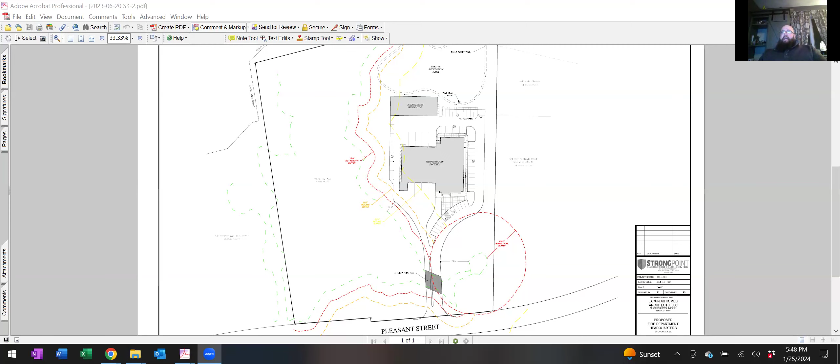So to that end, I'm going to bring up what ultimately became the proposed plan set. That's not the one. I believe this is also not the one. Gotta be this one. Okay, so what we're looking at here is the layout sheet from the plan set that we put forward.

You can see from the layout sheet that aside from the wetland crossing area, we've kept all hardscape out of the 25-foot no activity buffer zone, by design, to meet what is in the local bylaw. We have proposed to cross the wetland in the location we talked about.

This wetland crossing meets all of the requirements of the Massachusetts Stream Crossing Standards for an optimal crossing, which is beyond just a standard crossing. So it's the Cadillac, so to speak.

As we move through the plan set, I'll go to this sheet because it shows two more things: the limit of grading on the site and the drainage facilities, which come right up to the edge of the 25-foot buffer so we can maximize the area we have to work with.

It also shows that we have a fair amount of retaining wall around the site. As you come in from the road, the natural grade dips down to the wetland and then starts to come back up. Obviously, that doesn't work very well for fire trucks, so we need to flatten that out a bit.

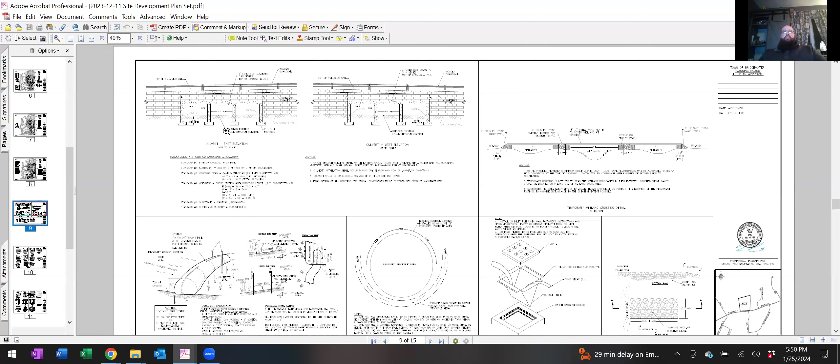I'm going to jump around a little bit, but with regard to the crossing itself, we did provide a detail, and this is what it looks like. Nope, wrong button. So this is a view standing basically at the vernal pool looking into the crossing, and I'm going to zoom in.

What we proposed at this time is 3 18-foot wide box culverts side by side. The reason for the sizing relates to the Massachusetts stream crossing standards. Standard 1 is that whenever possible, you provide an optimal standard, which is a 3-sided box culvert, so that's what we're providing. We have to embed those at least 2 feet into the substrate, which we are proposing to do.

Now, crossing span: what the stream crossing standards call for is basically 1.2 times the width of the wetland itself, boundary to boundary. In this crossing, the width of the wetland is 40 feet. We increase that by 20%, so we need a 50-foot wide crossing. Now, 50 feet is a bigger span than we can support structurally, so we did need to make some accommodations, and that's where we landed on 3 box culverts, 18 feet each.

The area in between, where you see my cursor here and here, is where the box culverts will butt together, and they will be located on footings inside the wetland boundary. The only permanent disturbances in those locations will be the sidewalls of the crossing. To help offset that, we've gone with 3 18-foot crossings, giving us a total opening of 54 feet, a little more than the 1.2 times we talked about.

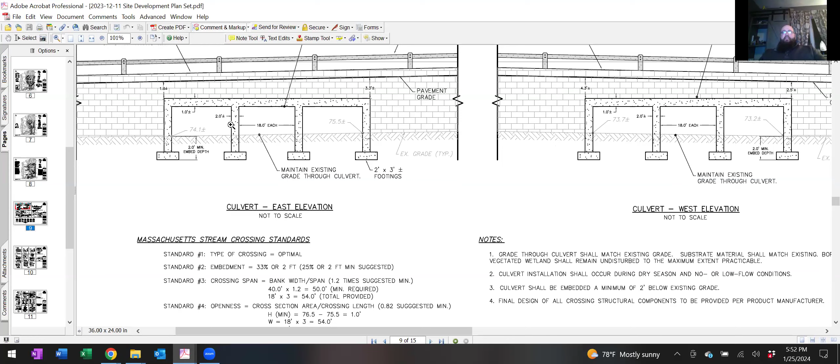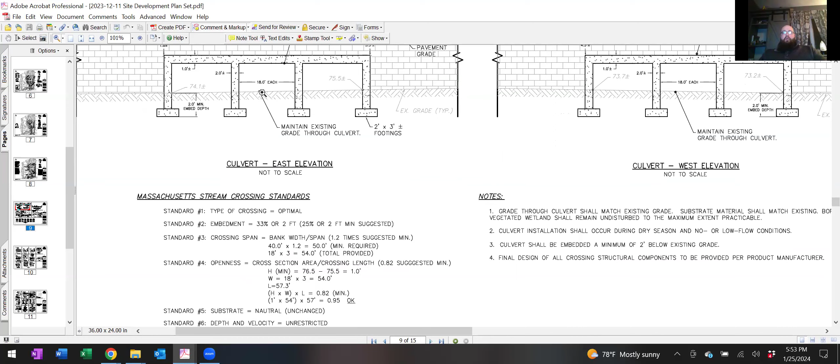From there, we get into the height of the crossing. We talk about the openness ratio, basically the cross-sectional area over the length of the crossing, and we illustrate that even from a conservative standpoint, we exceed that. We have a natural substrate for the bottom of the crossing, exactly what is called for, and we have unrestricted depth and velocity. So all of that is to say a lot of thought went into this design, and it does meet the standards.

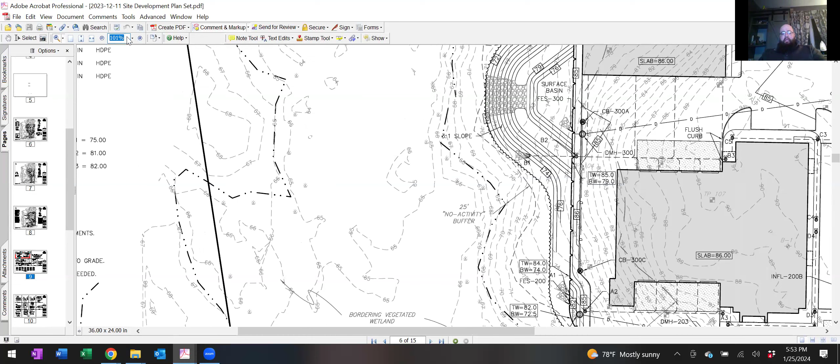Moving back to a different sheet, one thing noted when we submitted to DEP and they issued their permit number was that we did not propose at that time wetland replication to offset some of the disturbances. That was my choice. My reasoning was that this is a very small area of impact, totaling just under 1,800 square feet. Relate that to the much bigger body of the Hockomock Swamp, and it's completely negligible. Additionally, the site is entirely vegetated now, so there aren't a lot of degraded places on site that we could go in and make better.

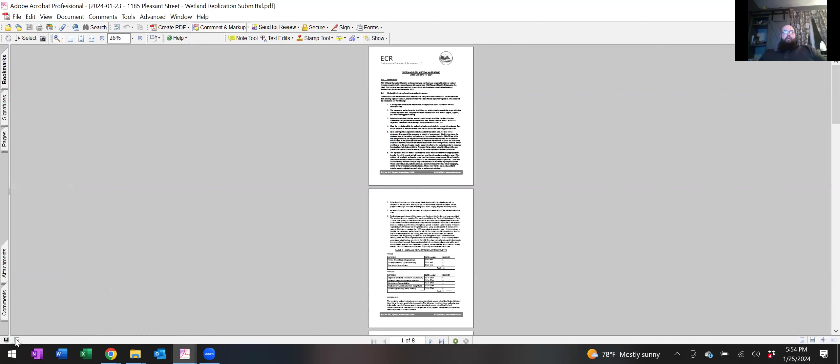DEP made some comments that while they understand that, the regulation does call for a 1-to-1 wetland replication. So we went back to the drawing board on that, and that's where we submitted this document. You folks should have received this, albeit earlier this week. I know we didn't make the 1-week timeline, but I wanted to get this in so we could walk through it here. And if you need more time to review it, absolutely, we understand that.

This is the crossing, and this is a drainage outfall right here. So we've situated a location of equal area to the crossing to do a wetland replication just off the end of this drainage outfall. The thought being that we're already doing some disturbance in that area, so it won't take a whole lot more disturbance for us to get into this area and do what we have to do. I'll spare you the gory details, but if you read through the protocol on how to create this, there are requirements to not clear cut the area. We're going to preserve the trees that are existing and appropriate, things like that.

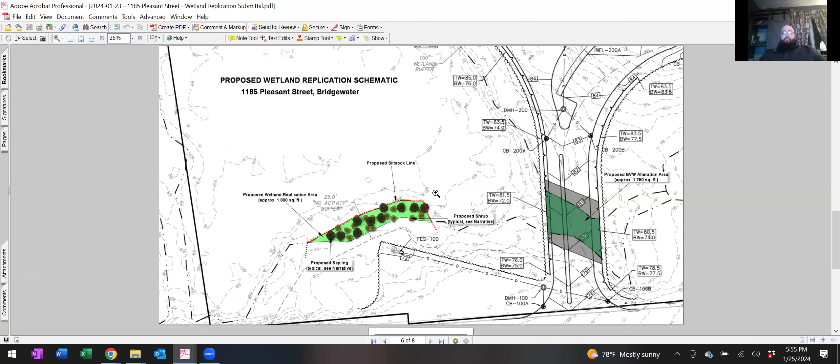I did have a conversation with the agent at DEP regarding this today. They noted, obviously, it is up to the commission to determine whether or not this replication is appropriate for the project, but they do not pose any further comment on this, which is a positive.

Jumping back, I'm going to touch on just one more thing that I think is important. If you look at our utility sheet, what you see is that we have sewer and communications all coming through the wetland crossing, through the main driveway, on top of the culvert but below the pavement. Those systems don't require a ton of earthen cover. Water, however, does. This site is serviced by a 3-inch domestic line for water, which isn't huge, but an 8-inch fire line, which is very big.

So we had 3 options to bring the water line over the crossing or through the area of the driveway. The first option is to put it on top of the wetland culvert. In order to do that and make cover requirements, we'd have to fill even more on top of the culvert, which just equates to more fill material, more retaining wall, and different drainage patterns that would be less site friendly. So we didn't think that was a good deal.

Alternative number 2 is that we tunnel it and go under the culvert. That makes for a lot of maintenance problems if there's ever an issue down the line, and causes a whole lot more wetland disturbance to install, so we didn't want to do that either.

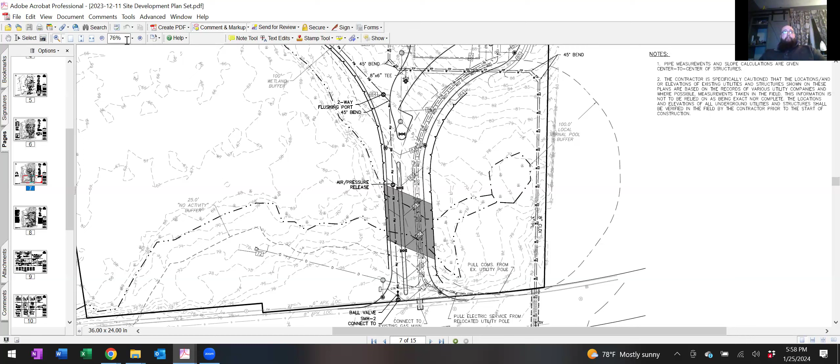Beyond that, we have provided extensive details for all the stormwater management. Sparing the gory details, the stormwater management on this site is a mix of a surface basin back here. We have one rooftop infiltration basin on the east side, and a subsurface basin that collects stormwater runoff on what we'll call the south side of the building.

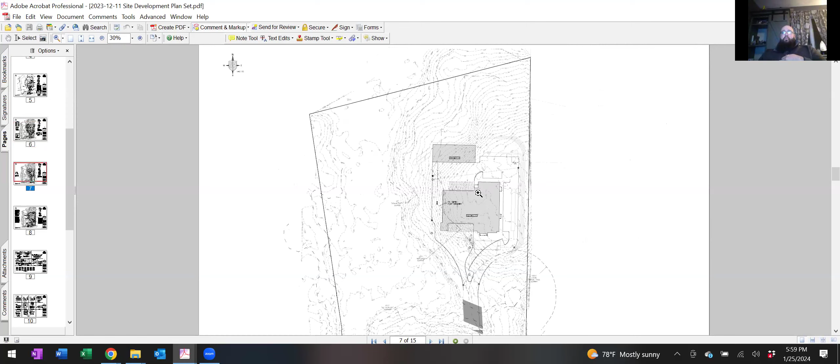Sparing the numbers, everything does meet and or exceed what is required under both the Massachusetts stormwater standards and the town stormwater requirements. So we hit all the marks with regard to water quality, recharge, peak rate attenuation, all of it. Beyond that, we've provided a complete erosion control plan. Obviously this project will be subject to a NPDES permit, so there will be additional oversight on erosion controls and things like that. We provided an operations and maintenance plan for the stormwater system and general upkeep of the site moving forward. So we feel that we put together a pretty thoughtful and conservative package for this, all things considered.

So, Madam Chair, rather than me just droning on for the rest of the night, I'm sure everybody's fallen asleep, I will turn it back to you for any questions.

Wendy, could I just interrupt for a second? Thank you, Eric. Yep, go ahead, Bob.

Eric, can you just speak to the need for the Army Corps of Engineers permit? I can, yes. So whenever you fill a wetland, you need to basically file a separate permit with the Army Corps of Engineers. In this case, because we're disturbing, not filling, less than 5,000 square feet of wetland, we can file what's called the self-verification form with the Army Corps of Engineers.

It's a form that we fill out ourselves. There is a review process by the Army Corps of Engineers where, I think in this case now that COVID's over, they'll probably come to the site. I know during COVID we did them virtually. They're a little bit expedited than a greater filing, but they do still take somewhere between 45 to probably 65 days. The caveat, however, is that we cannot apply for that permit until we have an order of conditions.

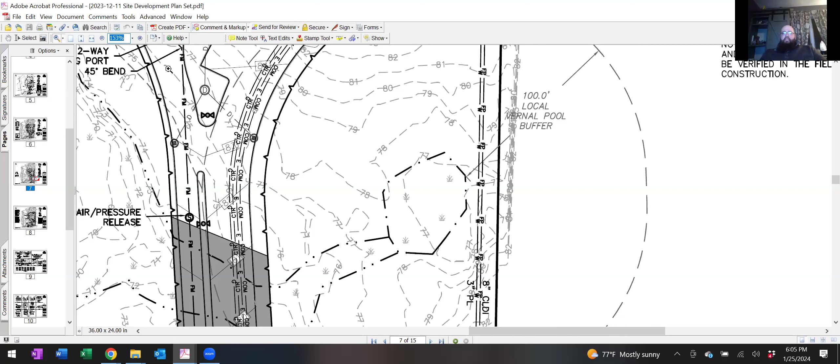Forgive me, I thought I had it dimensioned on this sheet and I don't, but I can certainly confirm those numbers. My recollection is there's about roughly 15 feet between this edge of the vernal pool and the property line. So my intention would be to sandwich it right in between, or even as close to the property line as we feasibly can. Obviously we need to allow ourselves room to trench and install, and we can't touch the property line. Yeah, that's my concern, is the trenching by that pool. We do have a couple of very skilled site work contractors looking at this, and I do believe it's absolutely doable, we've done worse, but it needs to be done right with the right amount of oversight.

Okay, thank you. There's also a seasonal aspect to that vernal pool too, Eric. There is, yes. So it could very well be conditioned that that water line is installed during a time of year that is not prime vernal pool season. Okay, yeah. Good presentation, thank you. Good point, Eileen. Thank you.

Harry, do you have any comments? I'd like to thank Eric. He did an extremely nice presentation. I've been on the board for years, I'm not going to say how long, but that's one of the best presentations with all the information he's given and why. Thank you, Eric. Thank you, sir, I appreciate that.

Okay, so I have a couple of comments to make. Brian, I wanted to thank you for the information you gave at the beginning. I appreciate the different Hale Street, Crescent Street, Pleasant Street options. It seems like this is the better place if they're going to move into another unit, it makes more sense to be out this way, and I understand that. Also, Eric, the plans, like people have said, have been thoroughly thought out, and it's great, the plans are great.

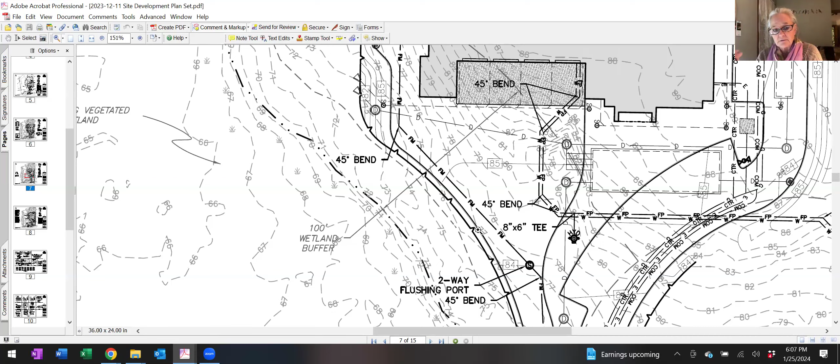I have a couple concerns about, so I get nervous when things are at the 25-foot buffer. You're right at the 25-foot buffer when you come up along that curve and it turns up straight, right? It's like right there. Along that whole area, the grading I was trying to look at, it's kind of continually going down. Is there going to be any kind of solid wall? Like what's going to stop any runoff from washing fire trucks or whatever running down off of the parking area or the road?

Absolutely, no, that's a great question. So the line that you see here with the V's in it is a retaining wall. Oh great, so that's going to be the limit of the grading, right? And it's a little bit harder to see on the PDF graphic, but this line where my cursor is, if you zoom in real close, it's a double line. That is a 6-inch curb. So the way the grading works on this site, there's a high point right here.

Anything that, let's say they're washing a truck in this location, which is likely to be the spot. Anything that hits the curb here goes this way to this catch basin, so it's encapsulated—it's not going to run off and flow overland. Anything that hits the curb over here is going to do the same thing to this catch basin.

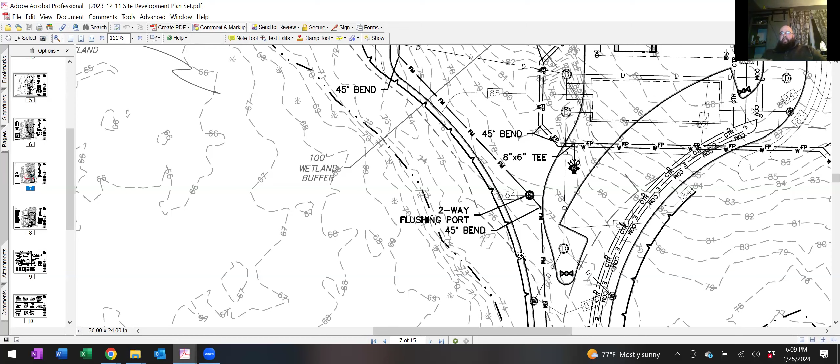They're going to be caught in the catch basins, and we have confirmed that the catch basin grates are adequately sized to take the storm events that they need to, so they won't be submerged or overwhelmed and pass downstream. The other thing I should say is that this manhole right here, which collects these two catch basins, is a water quality unit before anything goes into the subsurface infiltration.

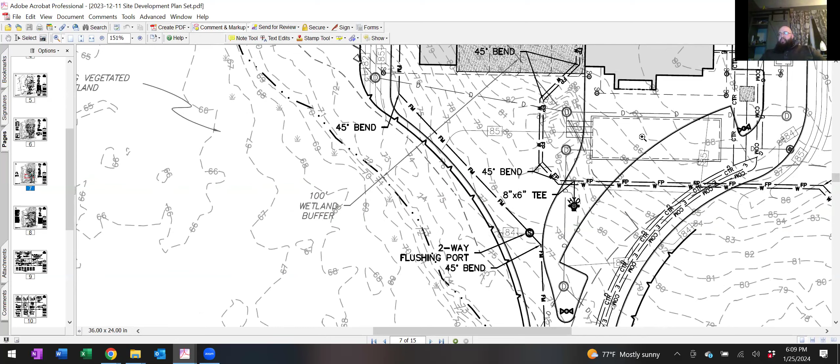So it's going to clean that up—it's going to take oils and grits out of there. And when we go up this catch basin, like we talked about, comes up here, this is also a water quality unit, so that's going to do the same thing before anything discharges to the surface basin.

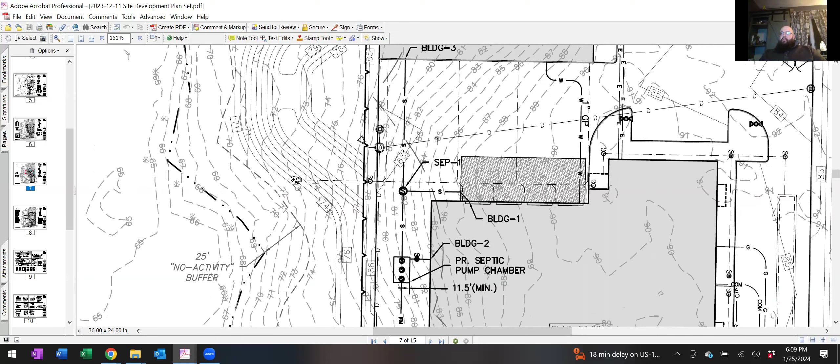So the only things discharging directly to the wetland are these dashed lines that you see here, and those signify roof runoff, all rooftop, so that water is considered clean. Those are stabilized outlets with riprap so that we don't have to worry about scouring out of the pipe and ongoing erosion control problems right near the buffer zone, things like that.

Okay, great, perfect. My other question was what Eileen brought up—I was wondering if something could be put in place for that water line work so that it's not interfering with the vernal pool. I mean, that's really close, 7.5 feet basically, you know what I mean?

So I don't know—it sounds like, with the question of a third-party review, and since we don't have the town engineer's comments yet, that we're probably going to continue it. So I don't know if that's something you can maybe take a look at for next time. That's just my thought.

You know what I could do—what would probably make sense is let's take a look at it. I'll be honest, dimensionally I'm a little constrained. What we could do is come up with a protocol for that specifically that we could get on the plans. For example, not to complicate the contractor's life, but it probably makes sense that when we excavate the trench, we load it into a dump rather than sticking it on the side, and we go stick by stick. We put both pipes in at the same time, side by side, so we're not double trenching, things like that.

That would probably be a good idea—the less disturbance, the better, you know? Understood.

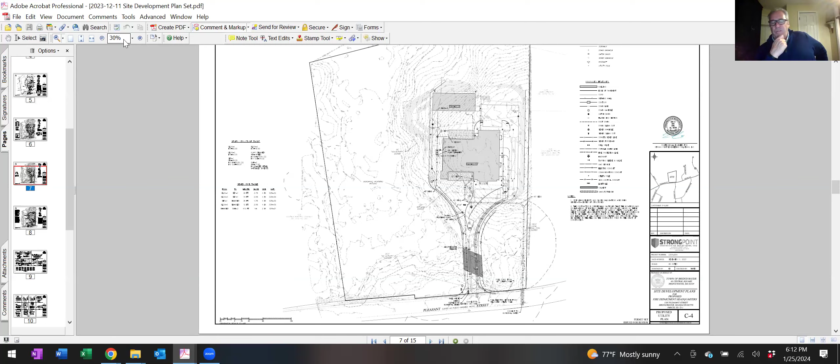Yeah, we can certainly solicit interest. We need to be mindful of the purchasing rules, so we have to keep the amount under $10,000 so we don't have to go out and do an RFP, which would further slow this process. But we certainly have past experience with engineering firms that can give us a sense they can do this work for an amount less than $10,000.

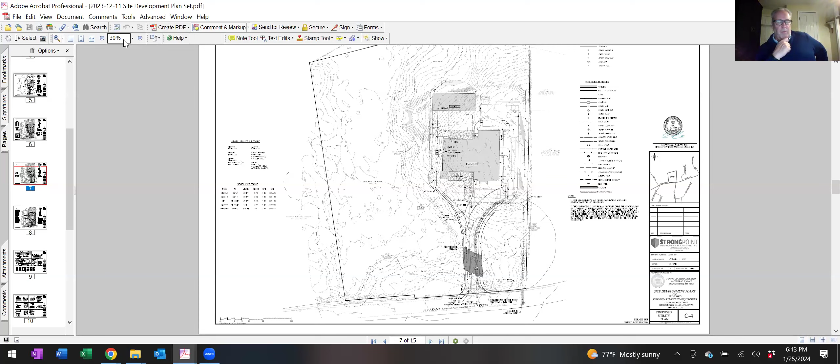But we'll definitely look into that and be prepared to give a list so the commission can decide who they want. We just want to be fair—to any applicant that comes in, it's the same request, so we're being fair across the board. Thank you, Bob.

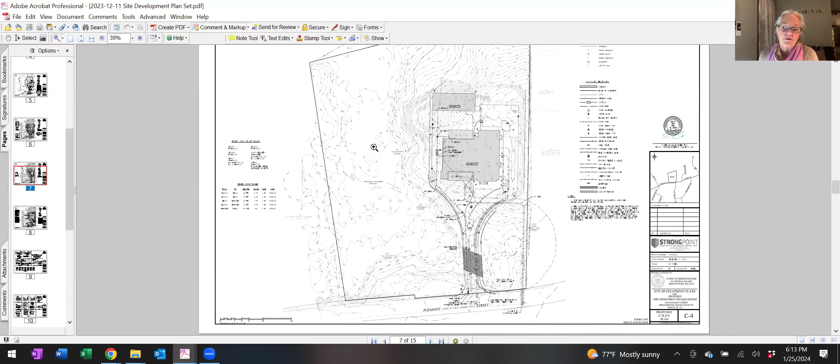Okay, thank you both. So we're not going to open for comments, we're going to continue. You're going to continue to the February 22nd meeting. So we can't have a meeting on the 8th, we're going to be down two commission members, so we won't have a quorum. So we're going to have to continue to February 22nd.

So do we have a motion for that? Motion to continue to February 22nd, did you say? Yes, the Pleasant Street Fire Station proposal. Second.

Roll call vote: Marilyn McDonald, Aye. Eileen Prisco, Aye. Harry Bailey, Aye. And myself, Wendy Smith, Aye.

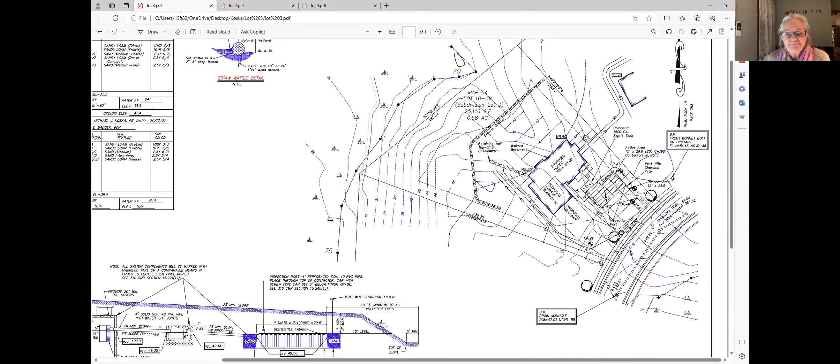The next one is map 54, lot 10-C9, known as lot 3 within the subdivision. Just beyond the rear property line, there's a finger of wetland here and here, representing the limit and edge of the wetland. This line represents the 100-foot buffer zone. The work here is grading within the buffer zone. What you see here is erosion control along the rear, basically the zoning setback line. All the grading will fall within just the backyard, so we can create a backyard.

The septic system on this property has its active area in the southeast corner, with the reserve area here. You have a driveway, and this dwelling has a top of foundation of 55. This is also going to be a walkout basement. We have 47.25 at the rear of the dwelling, and then this would just be a general grade to the erosion control. We also have a retaining wall just off the northwest corner of the house, as this is an attached garage with the driveway out in front. So we just have grading on that property.

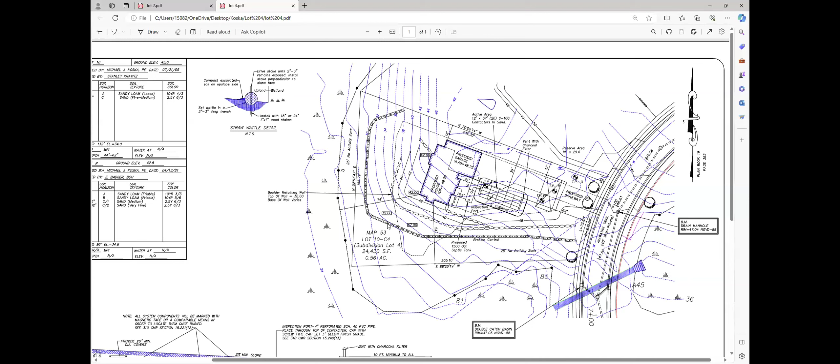Thanks, and it looks like you've done due diligence. It looks good. My only thing, and I'll say it just because I can, is on that last one, where the grading is steeper and it's going to be terraced, and it is closer to the wetlands. We've talked about it before in meetings when we have a situation like this, when people are doing any kind of fertilizing, that they try to be thoughtful when it comes to taking care of their yard because it's running off into the wetland.

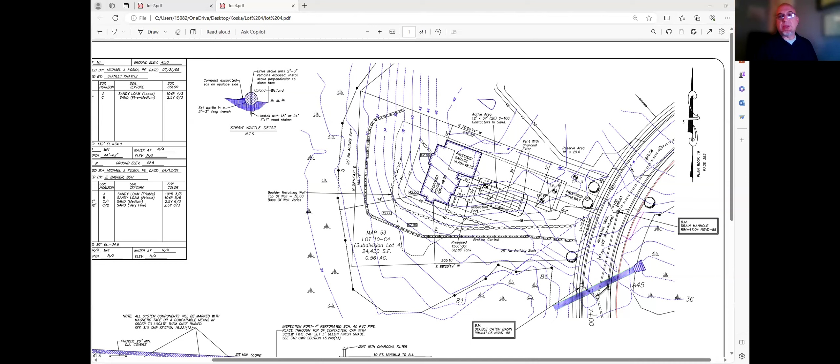That's the only thing that I really would think about with this. I would think that the commission could put that as a condition, seeing as how the order of conditions has to run with the property. That's something you could put in there as a special condition. And it's really more for this one, the other ones the grading wasn't as steep and it wasn't as close.

So, true. Okay, so if we have enough information, do we have any public comment or concern with regards to Hiawatha Trail? I would just say use the raise your hand feature or send a message in chat, please. I am not seeing any, Wendy.

Thank you. So do we have enough information to close this hearing? Yeah, I can make a motion to close, Hiawatha. And by the way, Wendy, awesome point on that with the fertilization, and yes, that can be conditioned, but great pickup.

All right, we'll do, if the chair can please entertain a motion to close notice of intent on Hiawatha Trail map 54, lot C10, C9, map 54, lot 10, C10, and map 54, lot 10, C4, please. Thank you. Do we have a second? Excuse me, Madam Chair. I would just like to correct that last one, I believe it's map 53, lot 10-C4.

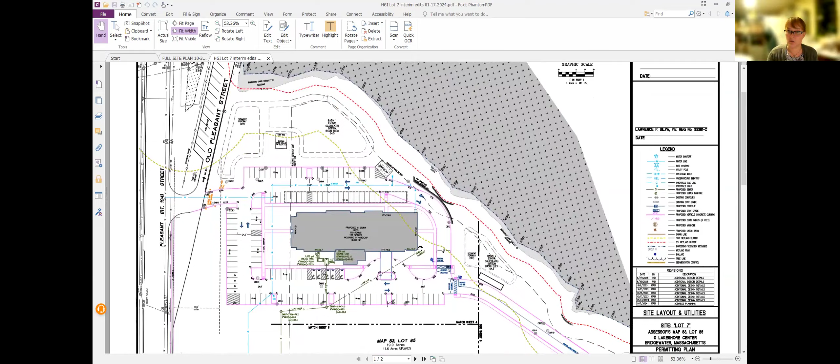I've included the intermittent stream that Ken flagged back in 2007 and again refreshed in 2022, I think he did it in 22. The grading, there are some tight points along the 25-foot no touch where we have retaining walls, but for the most part, all the toe of slope for basins is parallel to the 25-foot no touch.

Again, 10 standards for DEP were met. Mr. Tanzi, the town engineer, reviewed it and agreed upon it. And I entertain the commission's questions, comments, concerns at this point.

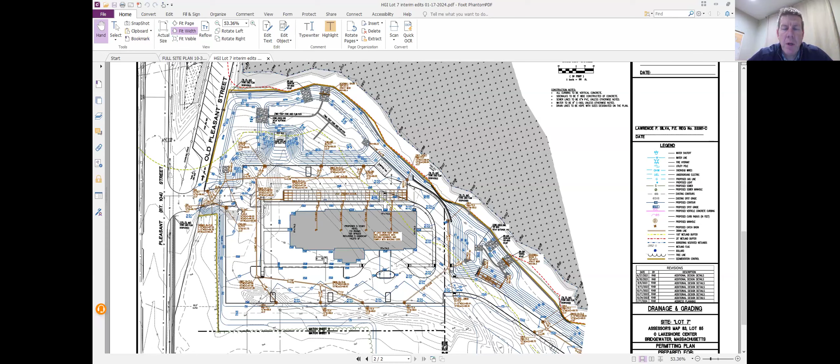We're the firm that has been leading the development of the filings under the MEPA process, which is the state's comprehensive overall environmental review of the project. The Lakeshore development has a long MEPA history, going back to 1983 with a series of filings. Claremont took over at some point, and the most recent completed round started in 2018 and resulted in a certificate, which said they'd like to get a sense of the overall plan for the entire development.

So in May of 2022, Claremont filed an Environmental Notification Form with the MEPA office. That was subject to a public comment period. We had a site visit with the MEPA analyst, and they issued a certificate requiring environmental impact reports. Claremont prepared a draft environmental impact report in very late 2022, in December, and then a supplemental draft environmental impact report in September 2023.